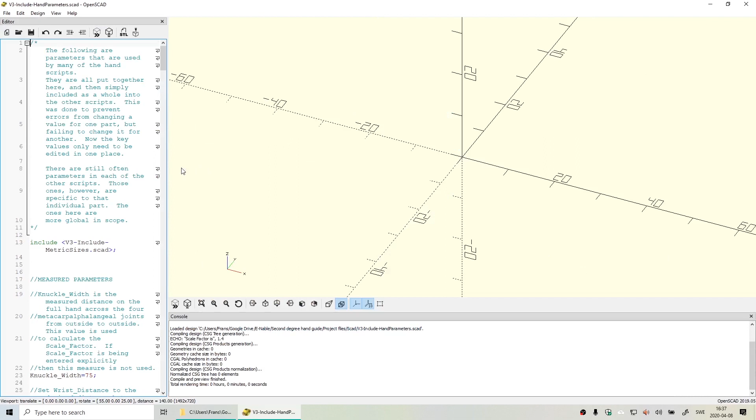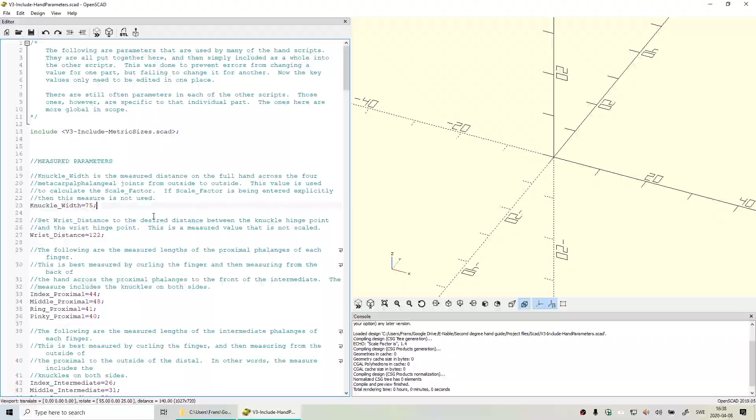You can see in the editor window to the left that there are a lot of parameters that need to be filled in. We are going to use the reference pictures to take measurements and then transfer those values into OpenSCAD. And with those we get the correct scaling of the models. To make measurements in the reference pictures, we are going to use Fusion 360.

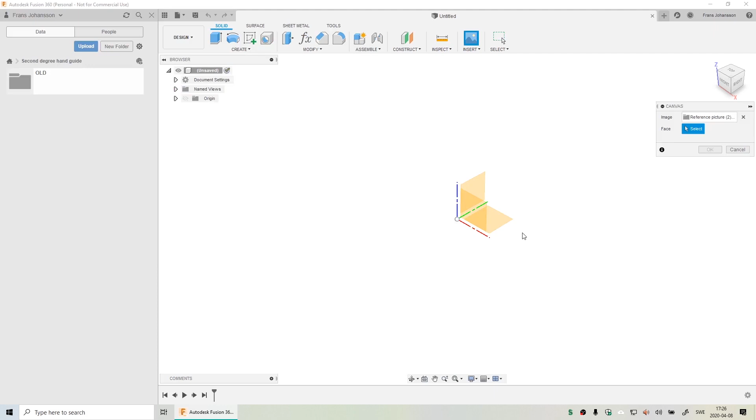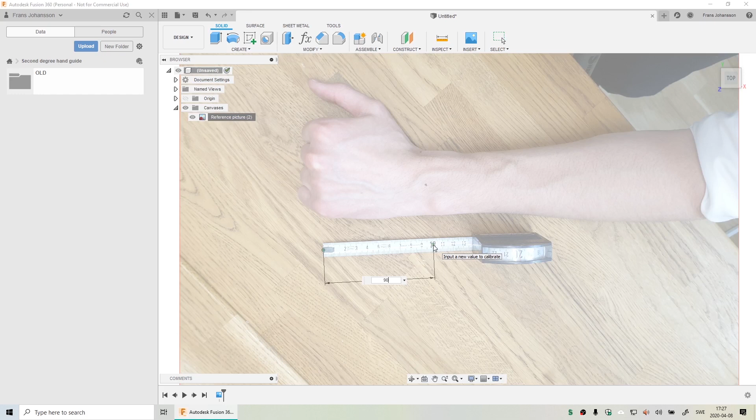Begin making your reference model by putting in the reference pictures as canvases. Place this canvas on the top face. Zoom in and calibrate the canvas. Click on 100 millimeters and type in 90. We want to scale down the picture because the tape measure is a bit further away than the top of the arm. Now the picture is scaled to the right size.

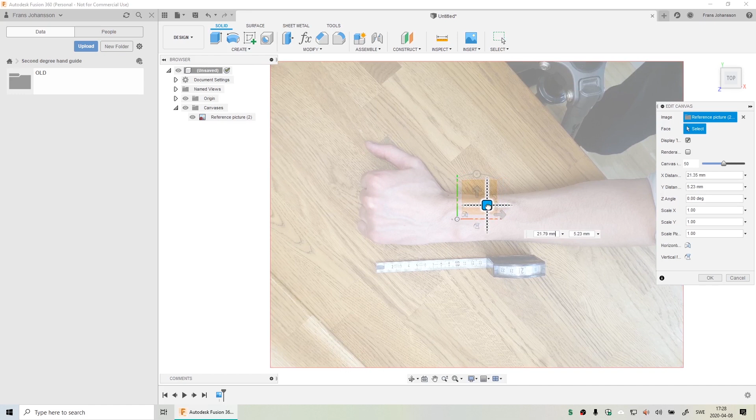Go in and edit the canvas. Show origin. Move the canvas so that the dot on the top side of your arm is in the middle of the origin. Rotate the picture so that the x-axis is in line with the arm. Hit OK and let's place the side canvas.

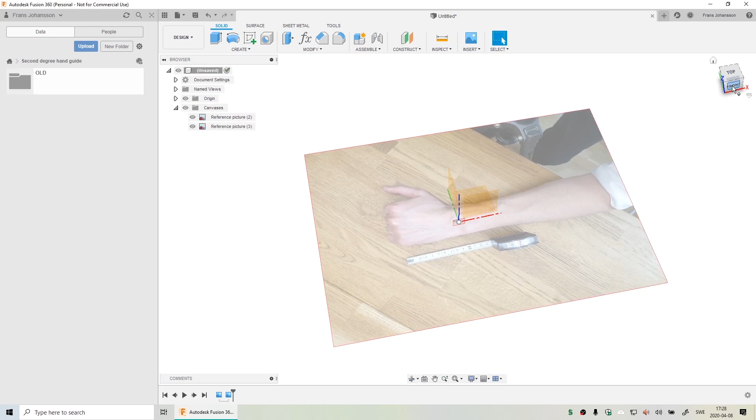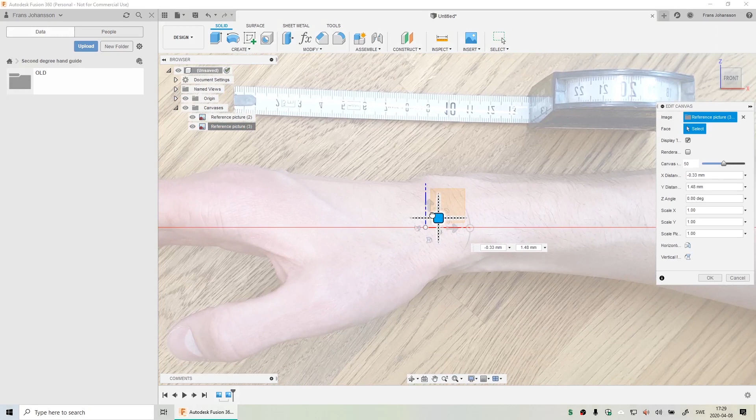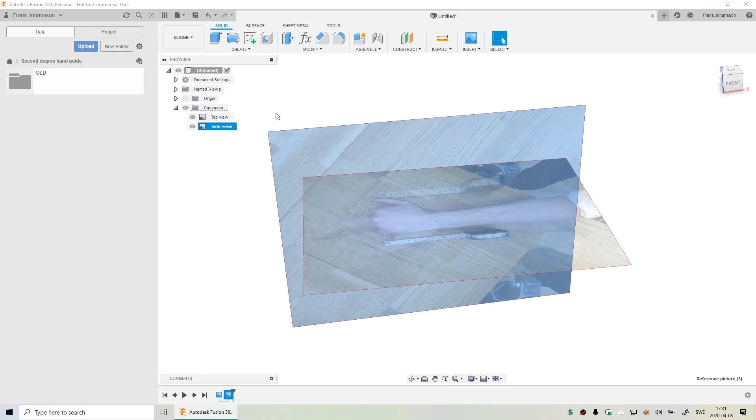Edit the canvas, rotate it so it has the proper rotation. Let's calibrate this picture. It seems like this is aligned well. Hit OK. Let's hide the origin again and name the pictures. Let's take some measurements from the canvases.

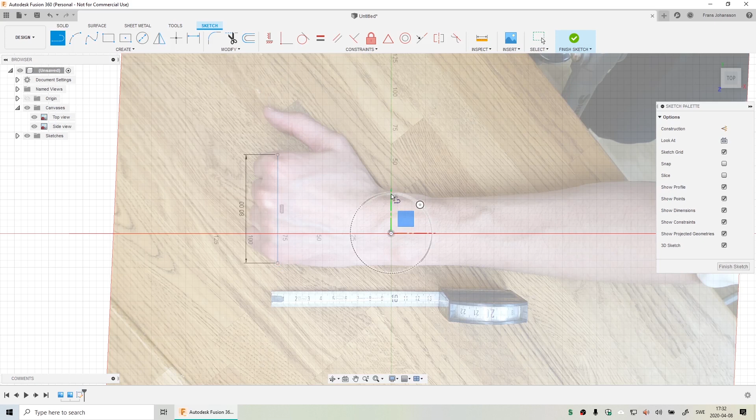We need the knuckle width. It's approximately here to here. Round up the value you see and type in 90. We need the wrist distance from here to here. We also need the knuckle distance, which is from the wrist joint center to where the knuckle hinge will start. It will be somewhere here.

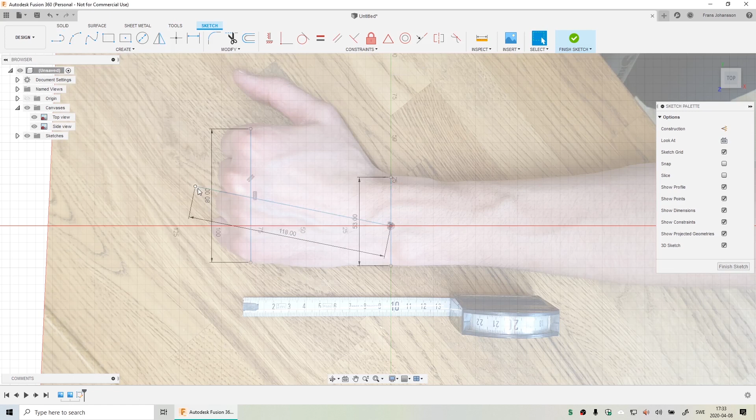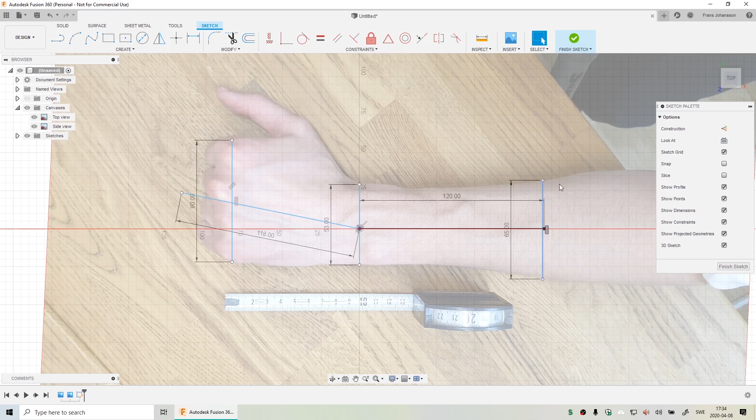The gauntlet length is from the center of the wrist joint and goes back 120 millimeters. From that point, we want to measure across the arm. 65. Now we have all the measurements we need from this side. Let's activate dimensions. Let's take some measurements from the side view. We need a wrist thickness. And we need the arm thickness at this distance as well.

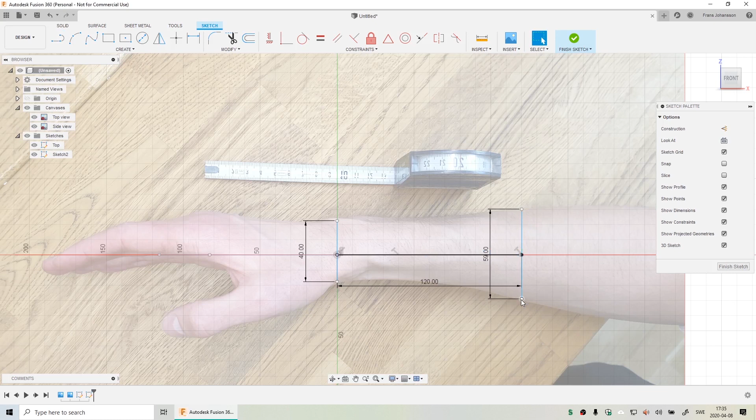Name the sketch. And show the dimensions. Save the file. Make a new design for the right hand. The same procedure goes for reference picture 1, which is the right hand. This picture doesn't have to be centered or lined up. Let's put a sketch in this one.

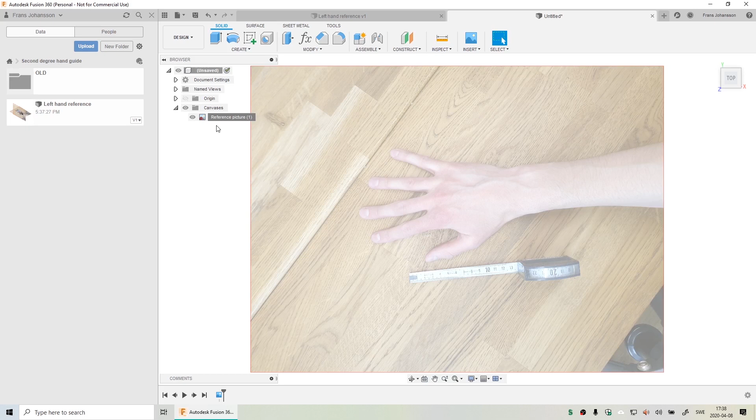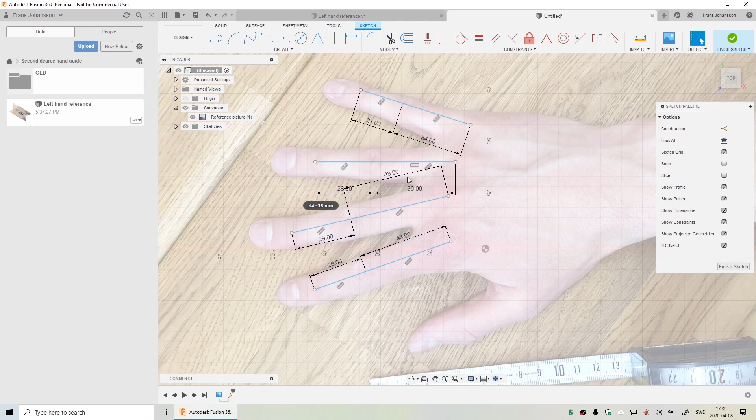Measure the fingers by putting some lines between the knuckles. Round up the values. Do this for all the fingers. We can rearrange the dimensions so we can see them a bit better. Like this. Save the file.

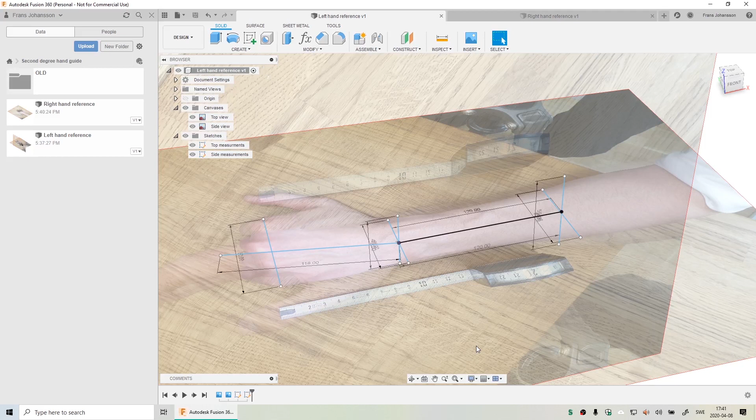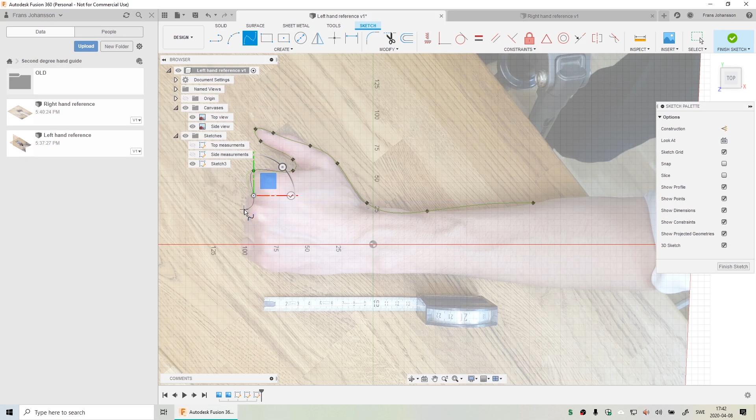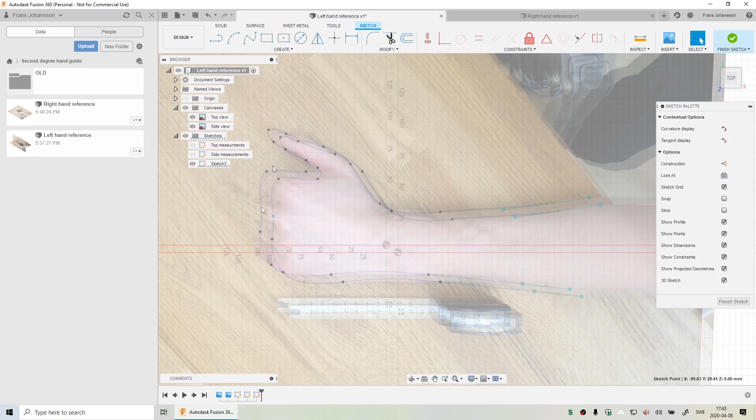Next step is to make a mock-up of the hand that will be used in the virtual assembly. We can hide the sketches and put a new sketch on the top side. Try to follow the contour of the arm with the spline tool. We want to create as smooth a curve as possible.

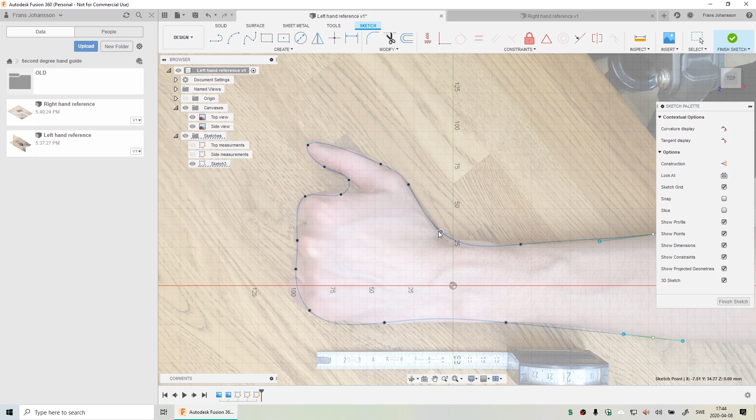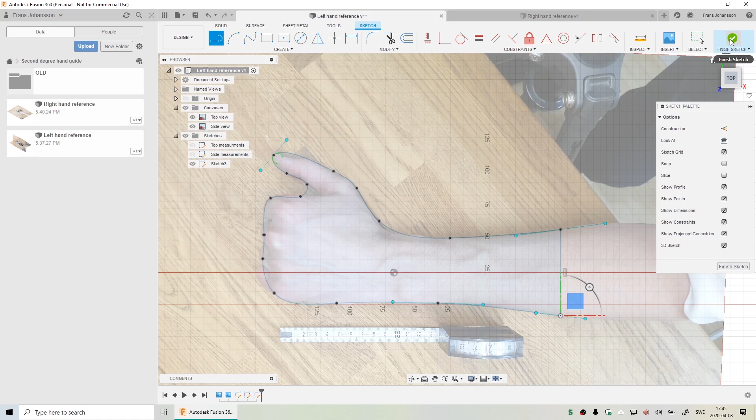Okay, let's connect the dots. Finish sketch. Make a similar contour line from the side view.

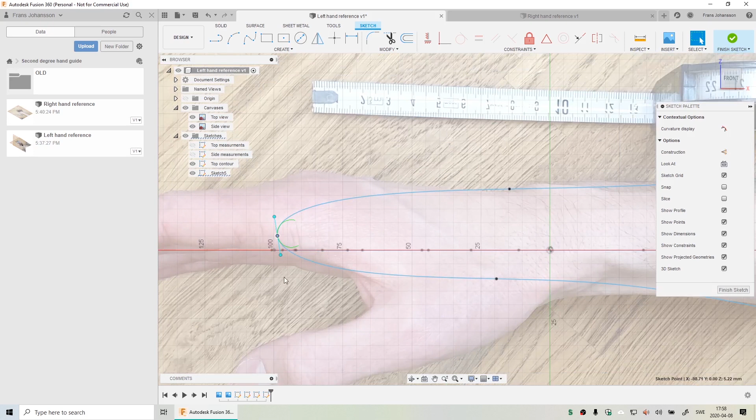In this case, the left hand doesn't have any fingers. We will have to come up with some shape here. Let's try to extend this end a bit further than the point you can see here that is coming from the other sketch. We want to overlap those two. Remember, we want to try to keep the curvature as smooth as possible.

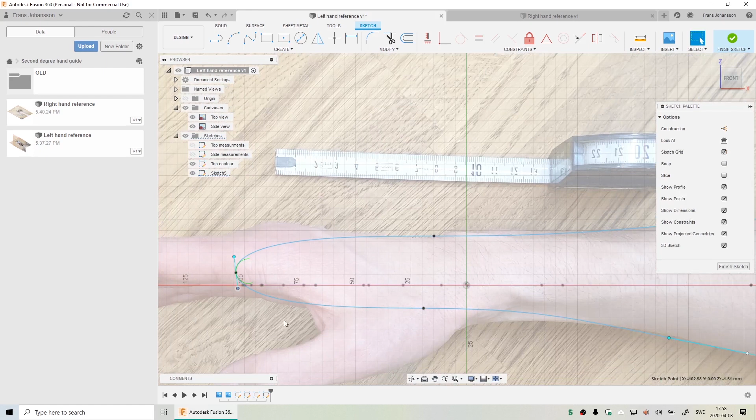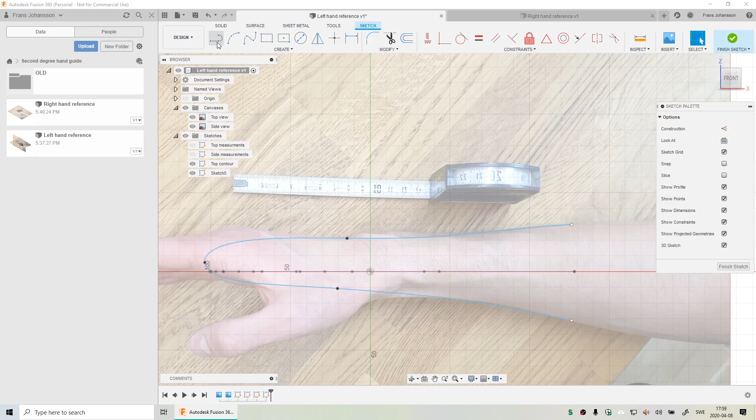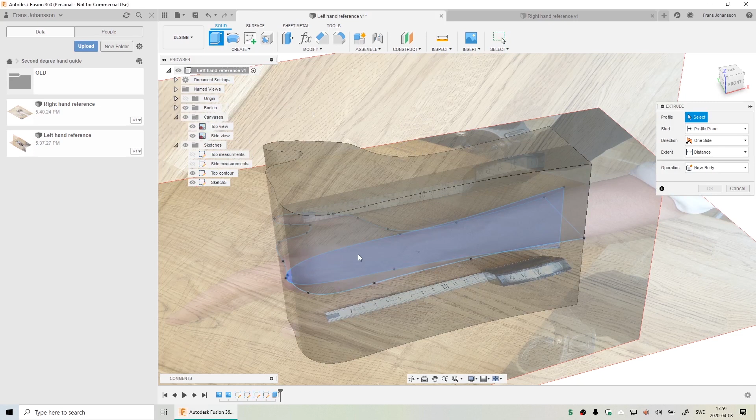Okay, I'm happy with that. Let's finish that sketch. I forgot to close the end. Now we're going to extrude those faces. Let's start with the top face. Make a symmetric extrusion. Pull it out. And make an extrusion for the side view, symmetric, pull it out and choose intersect.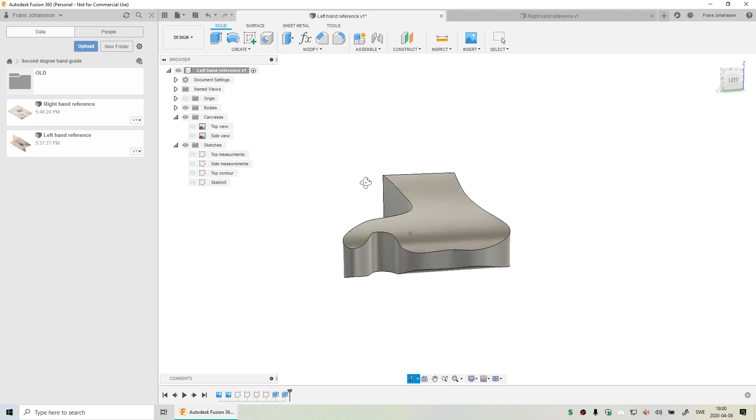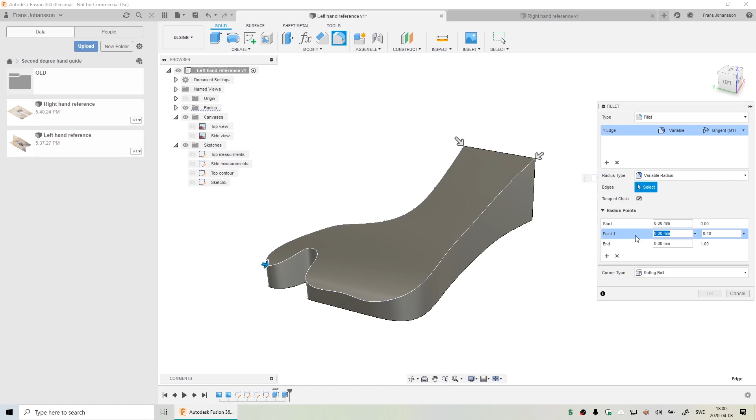Okay, now we have a basic shape of our hand mockup. Let's try to make this a bit more organic and round. Make a fillet and use the variable radius option. Add new selection of radius point and choose where you have the smallest curvature. I think it's here. Type in and try some radiuses. If it doesn't work, maybe you have to go back into the contour lines and make them a bit more smooth.

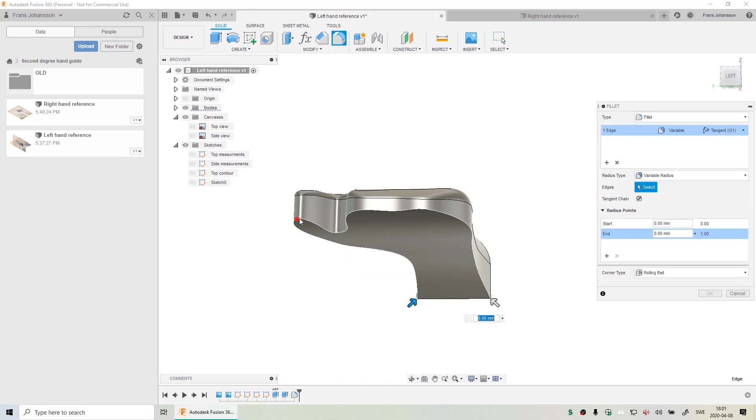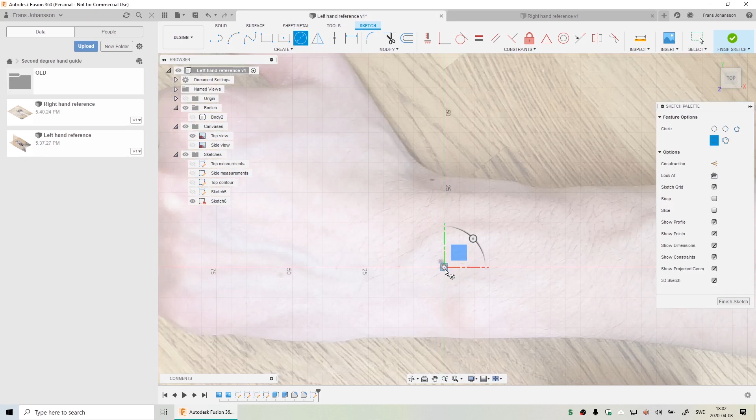Okay, I'm happy with that. Let's make the same for the other side. We want to have a reference point in the middle of the wrist joint. Let's make another sketch on the top side. Hide this body and show the top view. Make a small circle here. Finish the sketch and then cut through this body. Okay, now we know where the center of the wrist joint is.

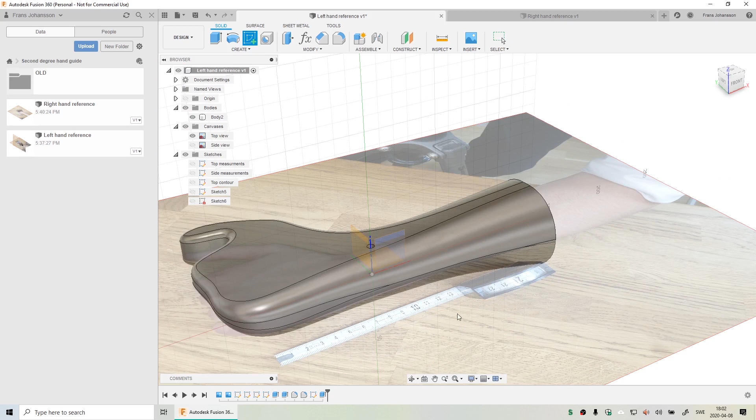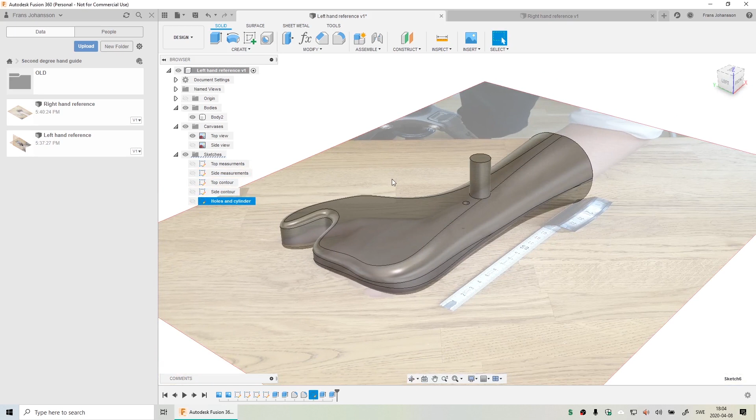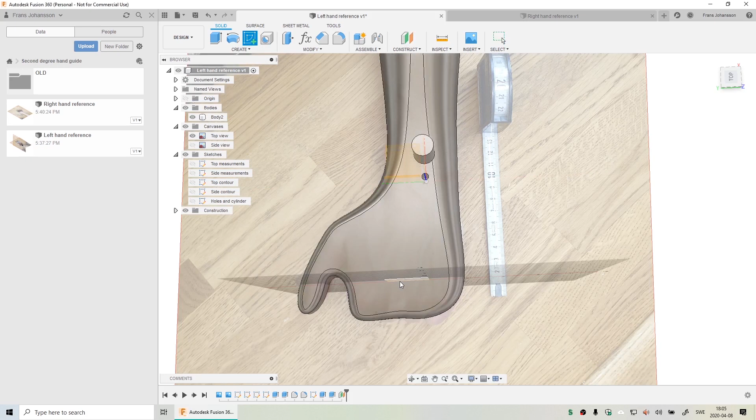We also need to make a cylinder shaped feature that is sticking out of this hand. This will become evident later when we do the virtual assembly. The last thing we need to do is to make a measurement of the circumference of the palm. So make an offset plane. Put this offset plane in the middle of the palm. Make a sketch on this new plane. Do a section analysis of that construction plane.

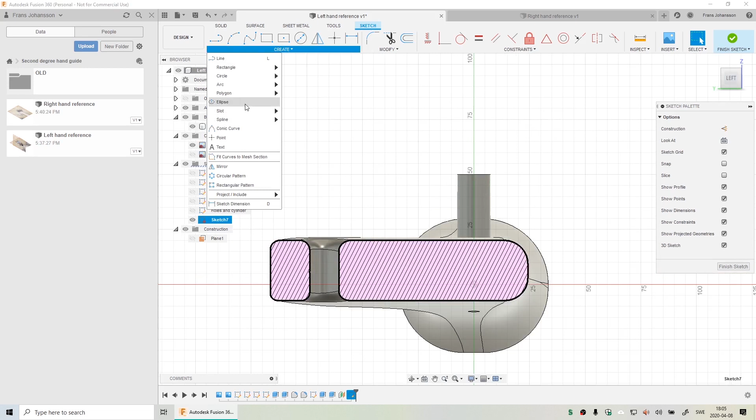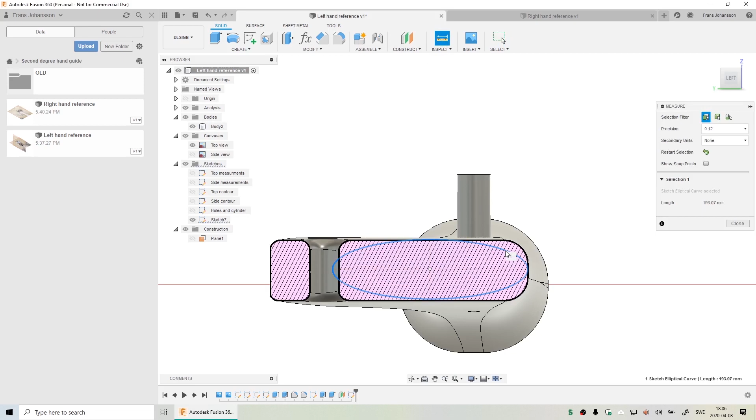Okay, back to this sketch and make an ellipse in the center of this section. I think something like this is good enough. And now we can inspect and measure the circumference of that ellipse. Okay, now we have all the measurements we need: we have a hand mock-up, and we got a palm circumference measurement. Then we're ready to go into OpenSCAD and input all the measurements to generate the hand models.

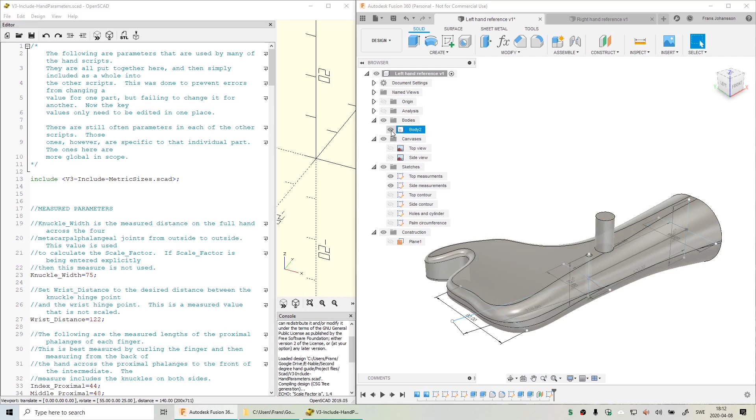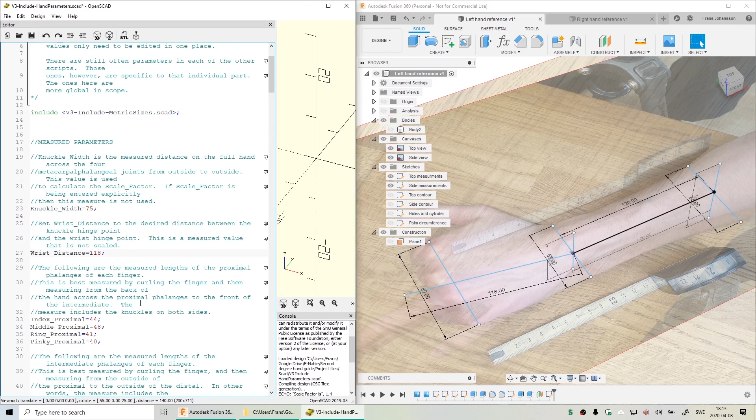Make the measurements visible and hide the body. The knuckle width is 80, but we will make this a bit smaller because I know that this script tends to make the geometry of the knuckle block a bit too wide. So I will lower that intentionally to 75. The wrist distance, 118. The proximal measurements we will find in this sketch.

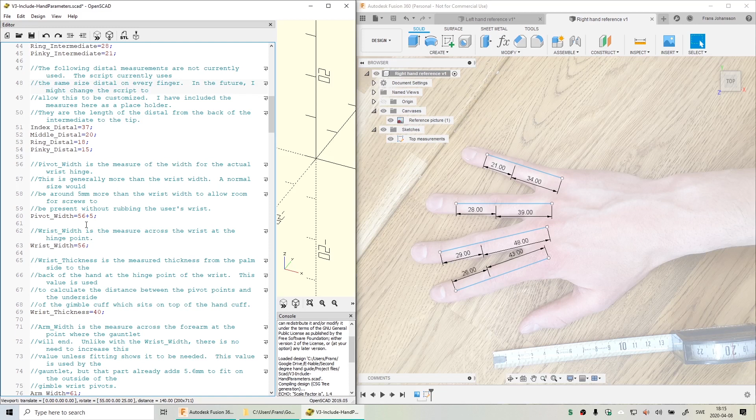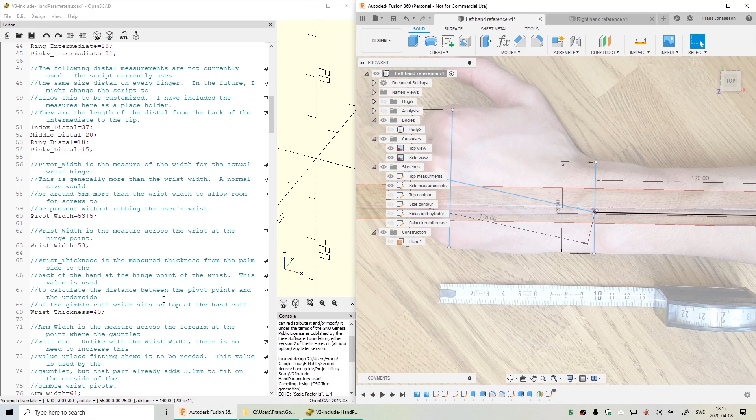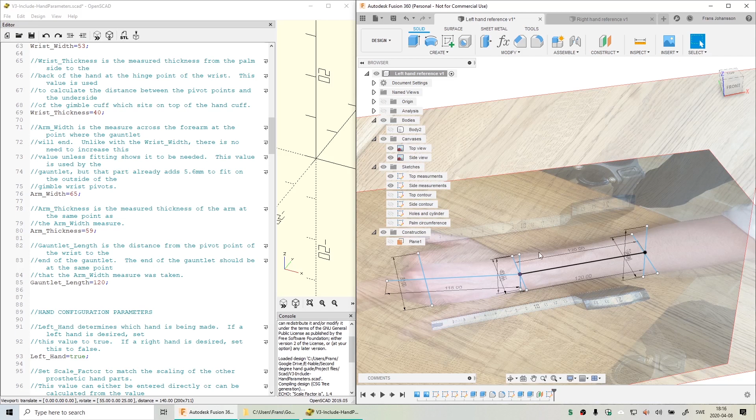The distal measurements are not currently used. The pivot width is the wrist width plus 5 mm. Let's go back. So I think we measured 53. So that'll be 53 plus 5. The wrist thickness, 40. Okay, now we have transferred all the values. We can save the hand parameters file.

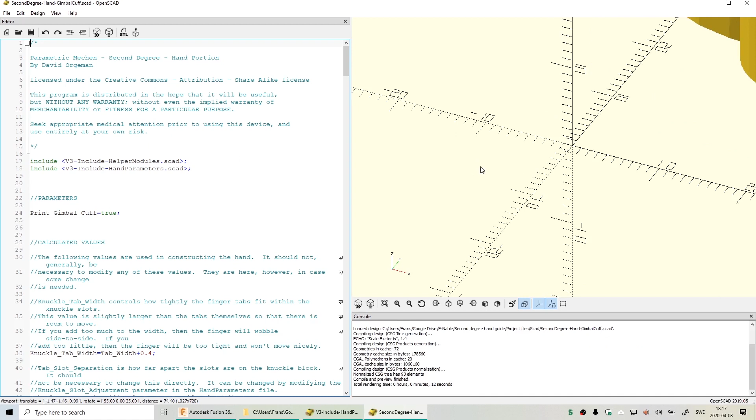We can now open the other SCAD files. By clicking on render, a file is generated. We can now generate the STL file. Let's save this under the STL folder. Do the same for all the files except hand parameters, helper modules and metric sizes. You can open up all the files and render them at the same time. If you want to change the values later, you will automatically get the new preview in the other files if you hit save.

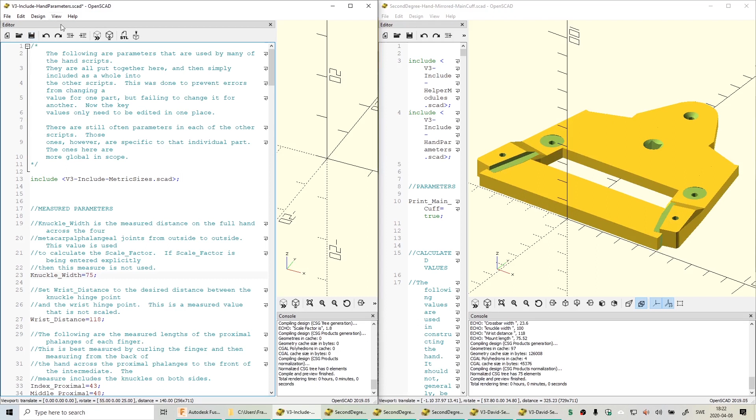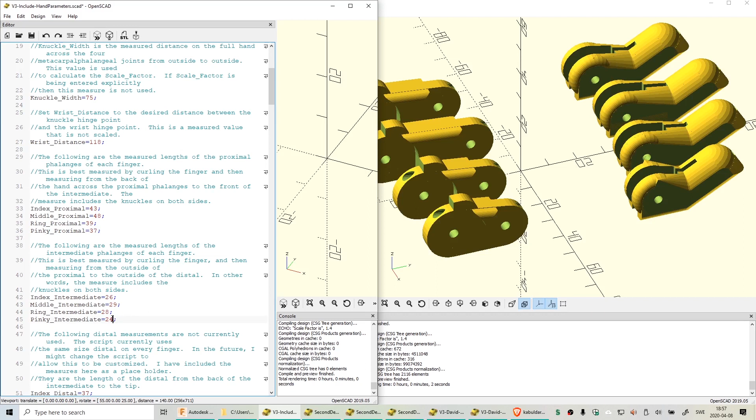Okay, but for now let's stick with 75 and generate STLs for all the components. I'm seeing in the finger geometry that we have some artifacts sticking out here and that this proximal is a bit too short. So let's go back into the parameter file and make the pinky intermediate a bit longer, as well as the pinky proximal. Okay, now I think it's fine. Let's also name and export this hand mockup.

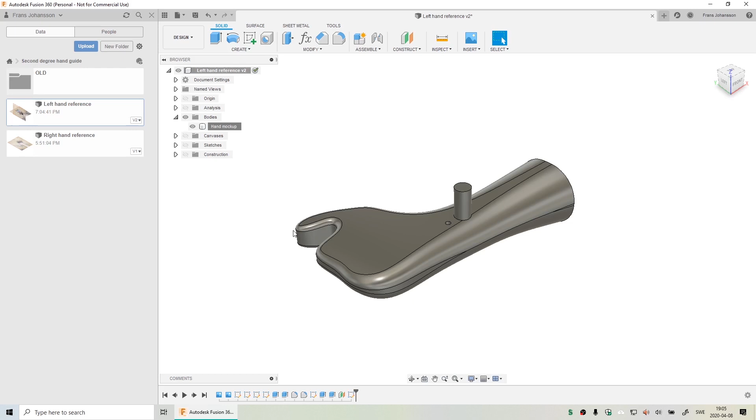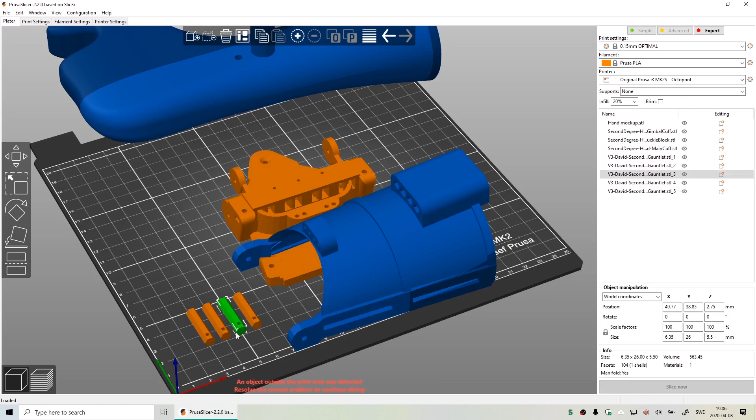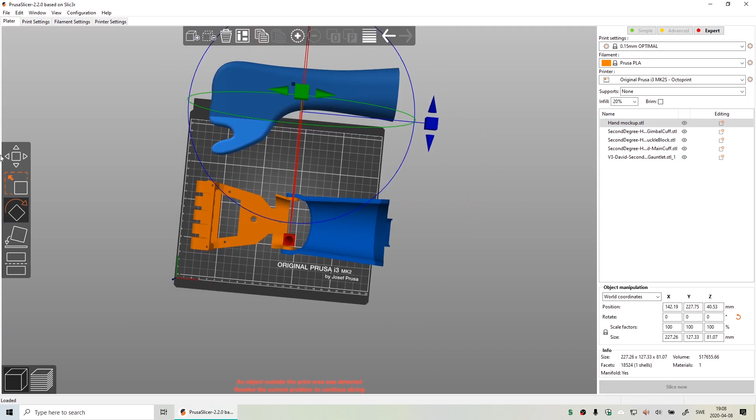Now that we have all the STL files, we can start doing the virtual assembly. Import all the OpenSCAD files and the hand mockup except the finger file. We can split the gauntlet to objects. Let's remove these small pins. Okay, now we can start doing our virtual assembly. We can now cut off the cylinder that we made. Okay, I think this looks fairly good.

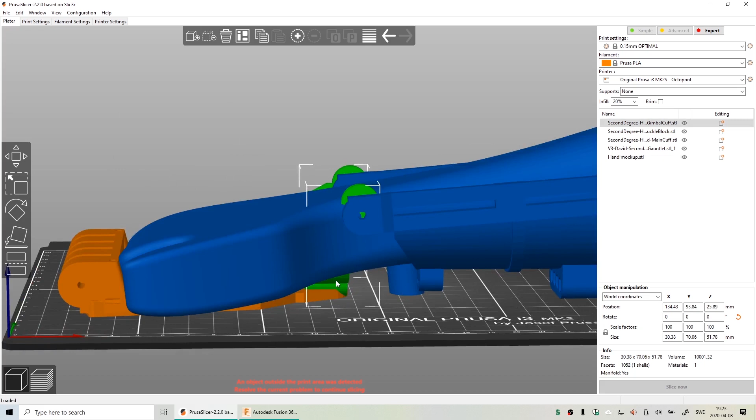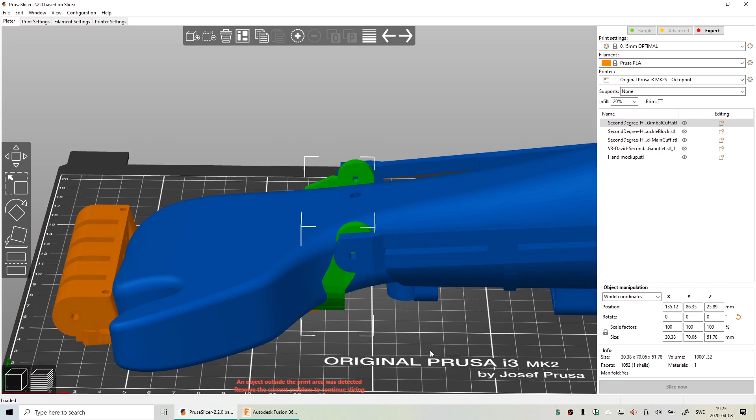We have some interference here, but I think it won't be an issue because this bone going here is quite flexible. If you notice any other interferences or that something is improperly sized, you might have to go back and put in some new parameters. Then you have to re-render and rebuild your virtual assembly. We can now go ahead and prepare our G-codes.

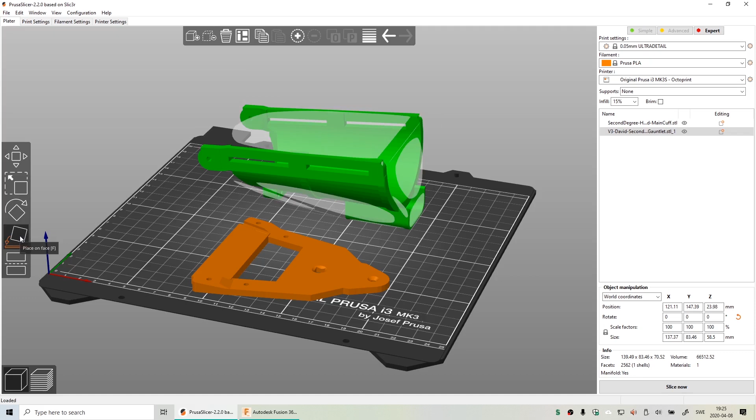So these two parts don't require too much detail and can be printed at about 0.3 layer height. So we will prepare those two together. The gauntlet will be printed on this face, and the main cuff is fine as it is. For these two parts we will use supports, and we will have the draft preset and add some parameters and perhaps some infill as well.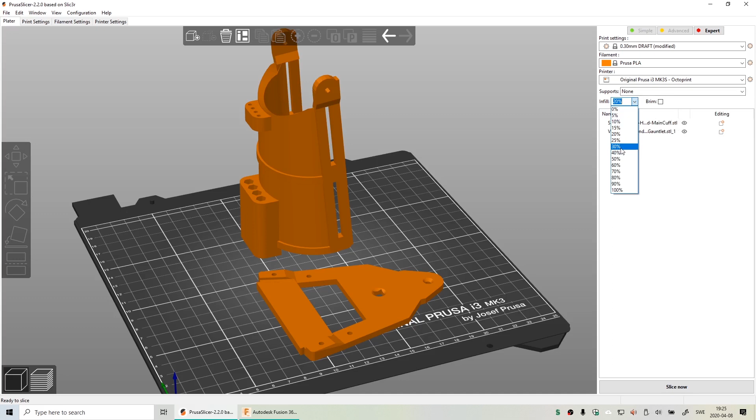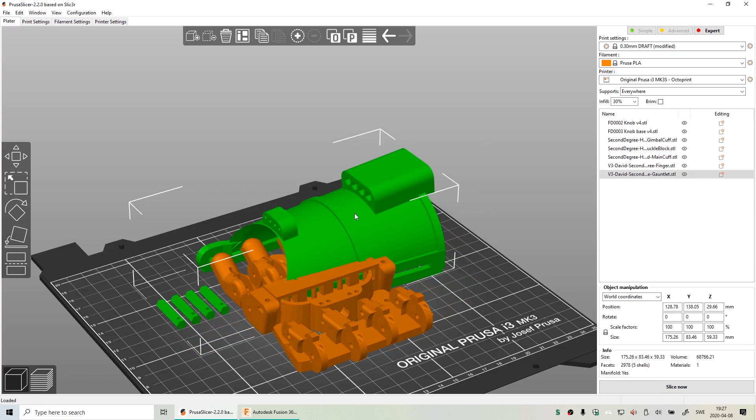Let's try to slice and get a section view of this part. Okay, I think this looks good. We're missing the support. Let's add that again. Okay, let's export that G-code. Remember that we need these small pins. We're going to remove the gauntlet, the cuff, and all pieces left are necessary.

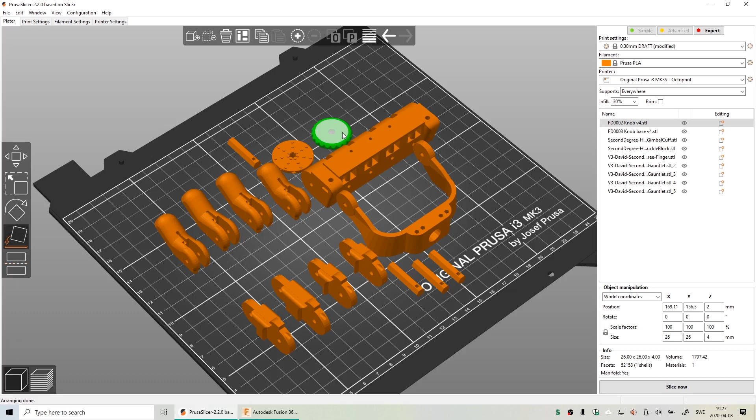This one is going to be printed on the other face like this. Otherwise, I think we're ready to print, but we will add support on build plate only in this case. This is very important because we don't want any support material in the small holes everywhere. And let's print this in quality settings.

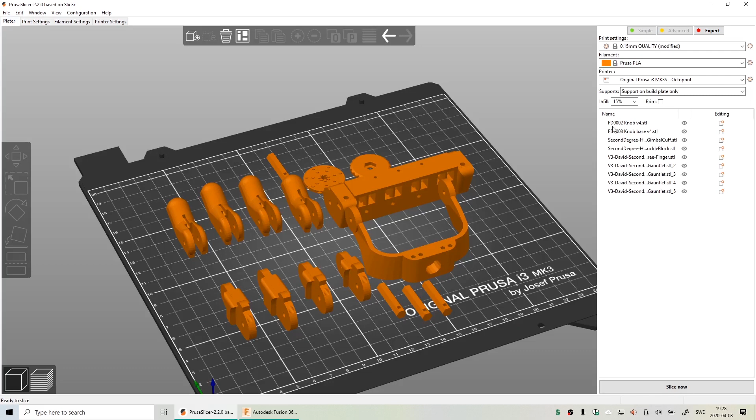Sorry, let's add that again and add some parameters, bump up the infill and re-slice. Export the G-code. Okay, now we're ready to print.